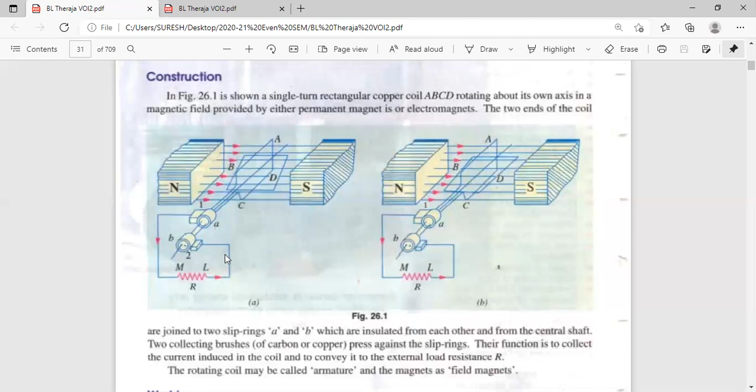So when EMF is developed, if you provide the closed path, then current will flow in this coil from negative to positive, like this. Again through C, D, A, B, again through brush 1, M, L, C, D, like this. This is your current direction.

Then why are they using the slip rings? See here, we have 2 slip rings I have shown, A and B, in the previous diagram. Actually, all these things are not necessary, but you should know if you want to study about DC motor. They are dividing this slip ring into 2 equal parts as a split ring, as segments A and B. Segment A and segment B.

Segment A is connected to brush number 1. Segment B is connected to brush number 2. The purpose of brushes is to collect the current from these segments. This A and B are called commutator segments.

You can also take 2 pole machine. If you take 2 poles, only north pole, south pole is there. If you take 4 poles, 2 north poles, 2 south poles will be there. See here, this is 1, 2, 3, 4. We can take 6 poles also. The second part is iron piece, that is magnets. See, the second part I will tell. First part is yoke. Second part is, see this one.

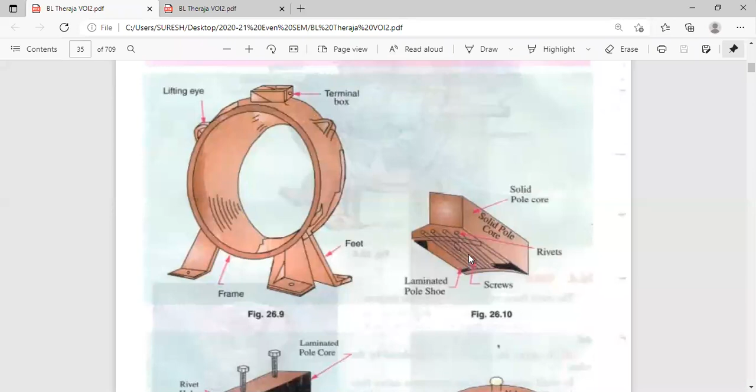This is the stator core cover, outer cover. Inside this outer cover, they will fix the poles. See, this is the iron piece, one iron piece. This is in the form of shoe shape. That's why it is called pole shoe also. See, this is the pole shoe. This will behave as magnet if you magnetize this.

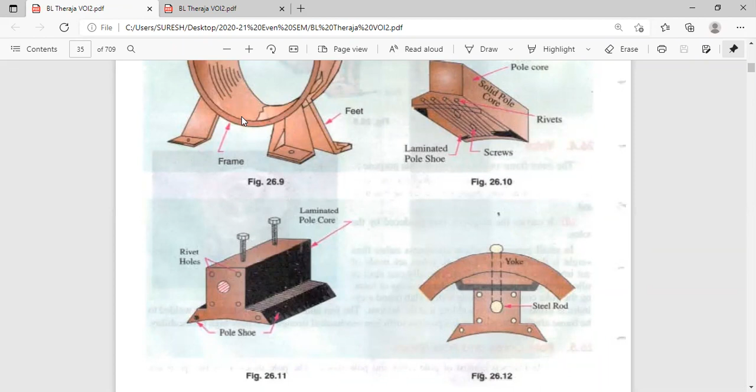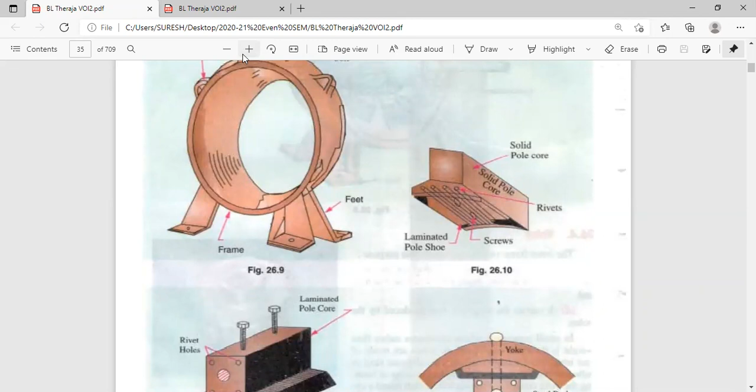So how are they fitting it to the core? With the help of bolts. See, 2 bolts are there in this. With the help of bolts, they will fix it in the stator frame. Suppose if you are having 4 poles, here 1, 2, here also 1, 2, 4 poles. If you are having only 2 poles, fix only 2 poles.

This is 1 pole. Suppose this is the magnet, how will we magnetize this iron piece as magnet? Which coil will we place? Flux coil or field coil or stator coil or pole coil. Coil means copper wire, core means iron piece. On this iron piece, pole core, they will wind one coil and connect it to the battery. When you give the battery, current will flow through that coil.

Around the current carrying conductor, flux will be developed, and this flux will magnetize this iron piece as magnet. In this way, it will behave as magnet. On the pole, we are having one coil that is called field coil. The third part is, see the third part.

Second part is iron piece, pole core, pole iron piece. Third part is pole coil or field coil. We will place one coil on the iron piece to make it as magnet. The purpose of field coil is only to make the iron piece as magnet. Now completed. This is the stator part: cover, iron pole core, magnets. On the pole core, we are placing one coil that is called pole coil.

Now come to the rotating part. Now we have completed the stator part. Now come to the armature core. Armature means the rotating part. This is the circular part. This is the armature, which rotates inside the motor or generator. This is the rotating part. This rotating part is having shaft. This is the shaft connected to this rotating part.

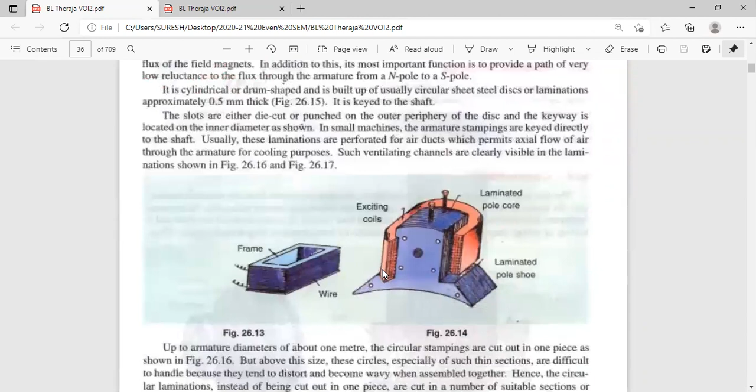See here, take one rectangular lamination sheet and cut it in the circular shape. See, they are taking one rectangular lamination sheet, they are cutting in the circular shape. After cutting this in circular shape, with the help of punching machine, they are punching the slots on the circular piece.

See how many slots are there? 1, 2, 3, 4. Let us take some 20 slots. I don't want to count. This is one slot. This is the second slot. This is the third slot. So one punching machine is there. Manually you can't do this. With the help of some automatic machine, we'll punch the slots.

This is one sheet. Like this, how many sheets are they taking here? See, they are fixing 2000 sheets. Is it visible? Let us assume this is 2000 sheets. They are placing all these sheets, and they are crushing with the help of weight. 100 tons weight they are taking. With the help of crane, they are lifting 100 tons weight and putting that weight on these 2000 sheets.

Then all these 2000 sheets are crushed to a very small size piece, which is called soft iron piece, which is in circular shape. Now see here, this is one slot. This is second slot. This is the third slot. This is fourth slot. Let us assume 20 slots are here.

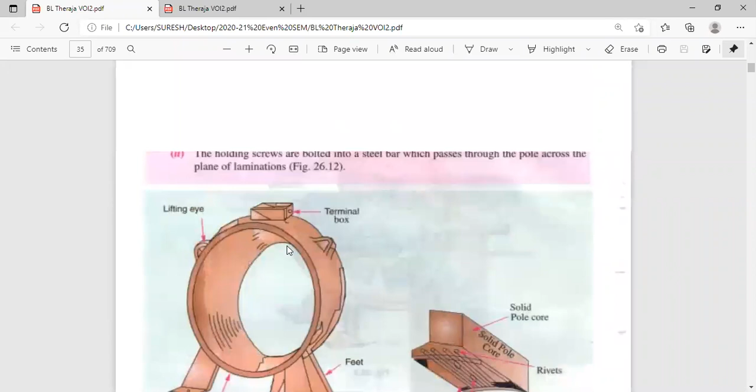Now, when this armature rotates in the flux, how many coils will rotate? 40 coils. See here, this is the armature. These are the slots 1, 2, 3, 4. Let 20 slots be there. 20 into 2, 40 coils will be there. When this is rotating, the magnetic flux is there in between North Pole to South Pole.

When this armature is rotating, the coils inside the armature are cutting this flux. The coil is nothing but rotating part. When the iron piece is rotating, automatically the coils inside the slots are also rotating. This coil is cutting the flux and EMF is induced in the armature coil, not in the field coil.

Remember this. There are only two coils. One is field coil for making the iron piece as magnets. Second coil is armature coil. This armature coil will rotate. When this armature rotates, automatically coils also rotate. When coils are rotating, the coil is cutting the flux and EMF is induced in the coil, not in the iron piece.

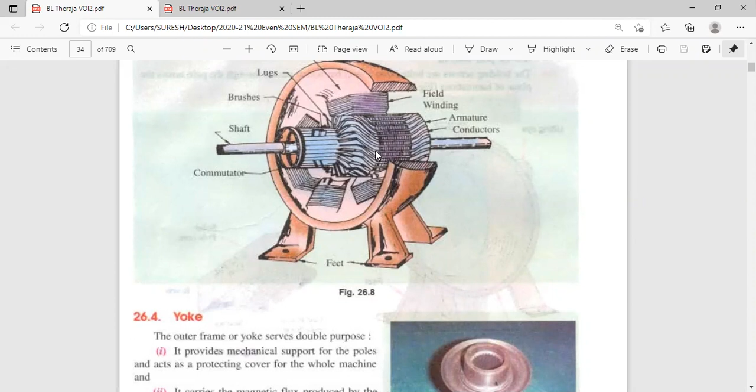See the parts. First one is yoke. This is the stator cover. This is the cover; it is made up of iron. Second one is pole core, pole core or pole shoe. Then pole coil. Why pole coil is used? Why pole coil is used? Anyone?

To make this iron piece as magnet. Okay. So this pole core is the iron piece. Pole coil is the coil, winding. Pole coil means winding, core means iron piece.

Next, fourth part is rotating part, armature. Armature is called rotating part. See here, this is the armature, rotating part. I have already told how to design this armature core. In the slots of the armature core, they will place the armature windings or copper winding. Armature winding is nothing but copper winding. These are the copper windings there.

Let us assume 20 slots are there and 40 coils. In each slot, 2 coils. Suppose in each slot, if you place 3 coils, how many coils will be there in the armature? Slots are 20. In each slot, 3 coils. How many coils will be there in the armature? 20 into 3. How many coils? 60 coils will be there in the armature.

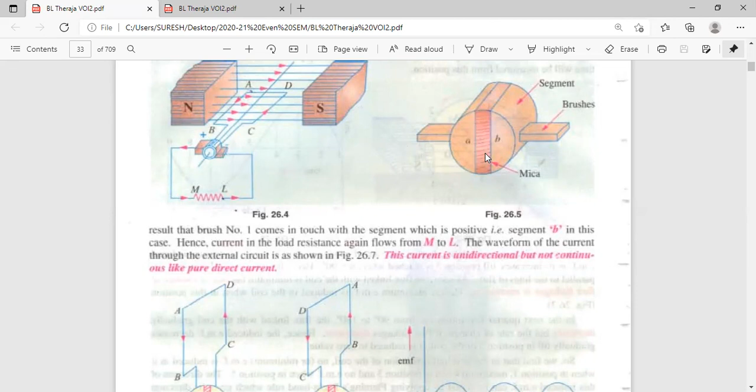So when the coil is rotating, see, ABCD is the coil. After 180 degrees, this CD will come this side, AB will come this side. See, interchange. In these two diagrams, observe. Total 360 degrees rotation will be there when armature is rotating. AB is this side initially. After 180 degrees, CD is coming this side. Again after 180 degrees, AB will come, 360 degrees. So when AB is connected to segment A, CD is connected to segment B. After 180 degrees, when AB is coming this side, segment A is also coming this side, rotating. Segments are interchanged, but brush positions are not interchanged.

Observe this diagram. A and B are the commutator segments. These two segments are interchanged after 180 degrees. This B is coming this side and A is coming this side. But brushes are not interchanged. Brushes are not connected to segments; they are in contact with A and B. Please remember, these brushes 1 and 2 are in contact with A and B. They are not connected to A and B. They are making the contacts. These brushes will collect the current from these contacts, A and B.

So since the brush position is not interchanged, your current direction will not change in the load. When AB is this side, current is flowing through ML. When CD is coming this side, still the current direction is not changed. That means these brushes are collecting the current from the commutator segments. Whatever the EMF developed in ABCD is AC EMF, but the current flowing in the load is DC current. Even though the voltage developed is AC, since the current direction is not changed in the load, your output current is DC. This is the DC generator principle.

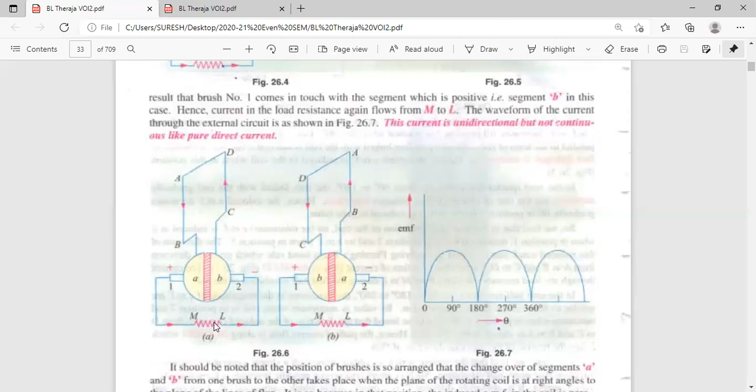Is it clear? All these parts, is it clear?

Yes, sir. Now see here, this DC generator is not in your syllabus. Nobody will ask about these parts or this diagram. But if I'm not explaining the DC generator, you can't understand induction motor - what is stator, what is rotor. All these things are not there in the induction motor, but I had to explain these things. That's why first, if you understand this concept, then I can easily explain the fourth unit.

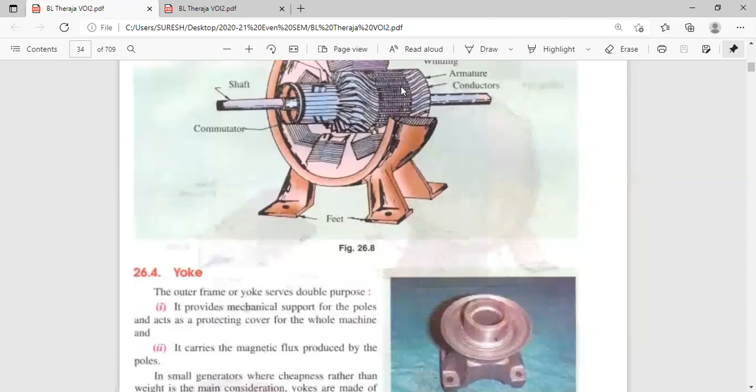Now see this, why they are taking iron piece? Directly they can place the coils. I have already told what is the property of iron piece - it is having low reluctance. Have I told or not? See here, the purpose of iron piece, I will tell you, write down in your notes. F is equal to phi into S. Otherwise, I will write it on the board for 1 minute.

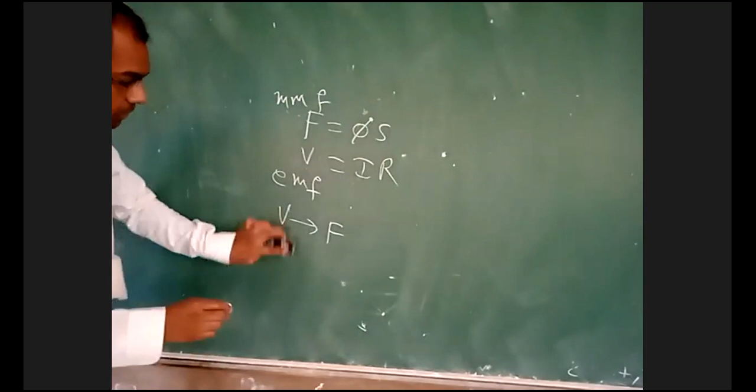See here. F is equal to phi into S. V is equal to I into R. F is the MMF - in magnetic field we call it MMF, here it is EMF. So analogous for V is force - magnetic force, electromotive force, magnetomotive force. Analogous for current is flux. In electric field we call it current, in magnetic field we call it flux. R is the resistance, S is called reluctance - R is called resistance in electric quantity, but in magnetic field we call it reluctance.

See here, current is inversely proportional to resistance. Similarly, flux is inversely proportional to reluctance. Next, in electric quantity, resistance will oppose the current. From this equation, if resistance is less, current will be more. If resistance is high, current will be less. That means in electric quantity, resistance is opposing the current.

In magnetic quantity, anyone? Magnetic quantity - reluctance will oppose the flux. Suppose if reluctance is less, flux will be more.

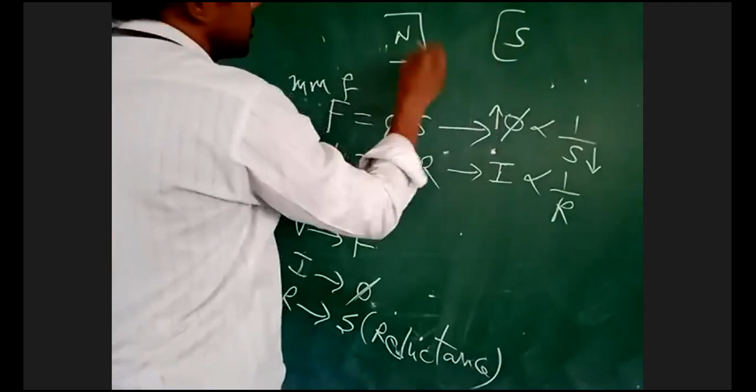We are having north pole and south pole. We are winding the field coil on the north pole and on the iron pieces. Suppose if current is passing through this coil, around the current carrying conductor, flux will be developed. Then they behave as magnets. Once they are behaving as magnets, phi is there in between north pole to south pole. Flux is there in between north pole to south pole.

Suppose if I am not writing down note - iron is having low reluctance. Write down note: iron piece is having the property of low reluctance. Now tell me, if reluctance is less, what happens to the flux? If iron piece is having low reluctance, what is the flux in the iron piece? It increases. So I want more flux in between north pole and south pole. That's why I'm using iron pieces.

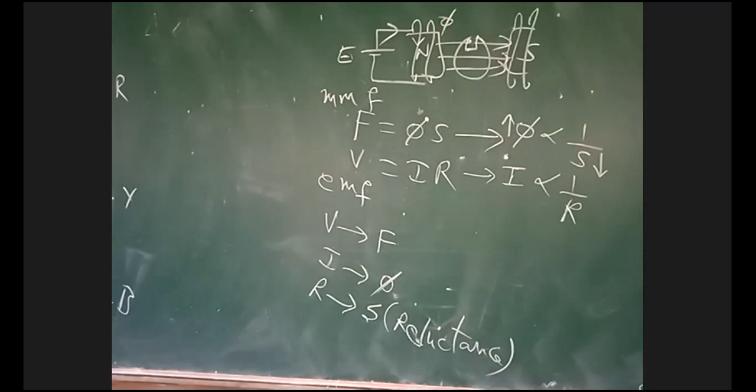I think it is clear about the iron piece, why you are using the iron piece. Yes sir, next we will go for the yoke.

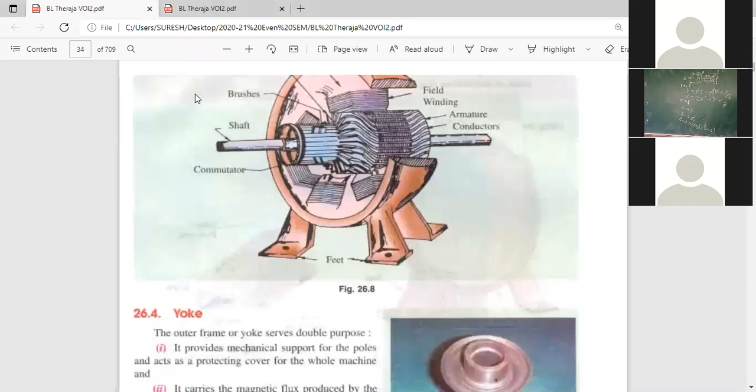Now we'll discuss the yoke. They have given two points about the yoke. What is yoke? It is the stator cover, the protecting cover, which I have already shown you. One circular part I have shown. See this circular part, this is the protecting cover. This is called the yoke, we will call it yoke.

The yoke is made of iron. Why this yoke? What is the advantage of the iron piece? I have already told you. What is the first advantage? To increase the flux.

See on the screen, they have given two points in red color for the yoke. First point: it provides mechanical support to the poles. Mechanical support means because to this stator cover you are fixing the magnetic poles, the pole shoes. It will give mechanical support without any vibrations in the house, and we are fixing it to the ground.

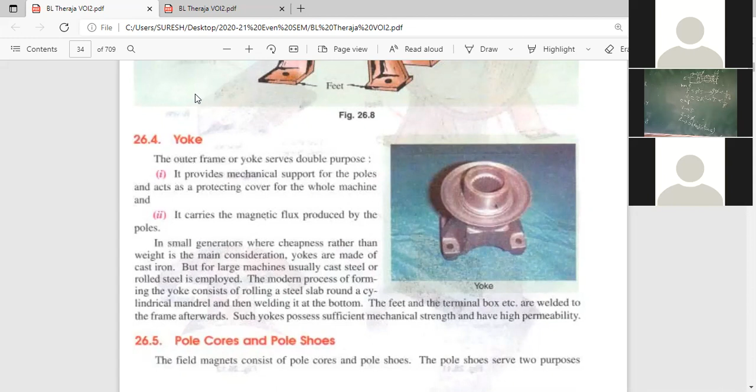What is the second point? It carries magnetic flux, more flux produced by the poles. If you use the iron piece, it will allow more flux to pass through it. These are the two advantages of the iron piece. That is about the first part. So these are some of the parts in the DC generator.

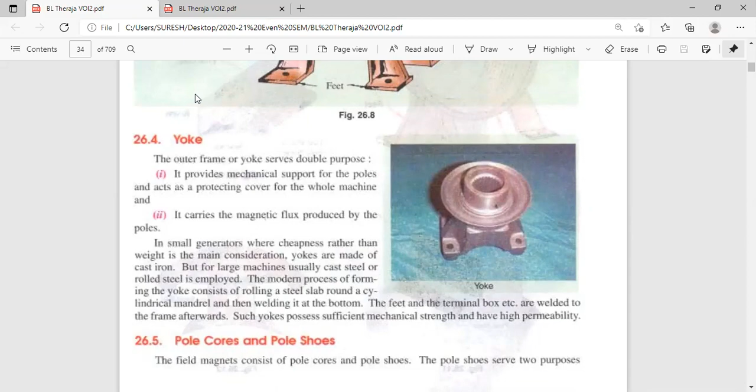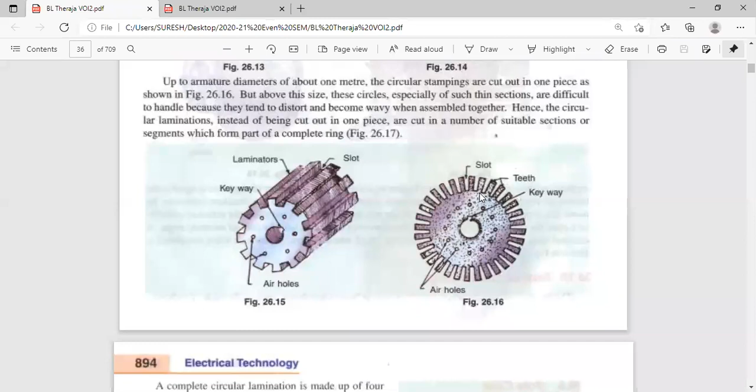See, this is about the armature core. In the slots, we are placing the coils. Coils means copper wire. Armature windings are nothing but armature copper coil.

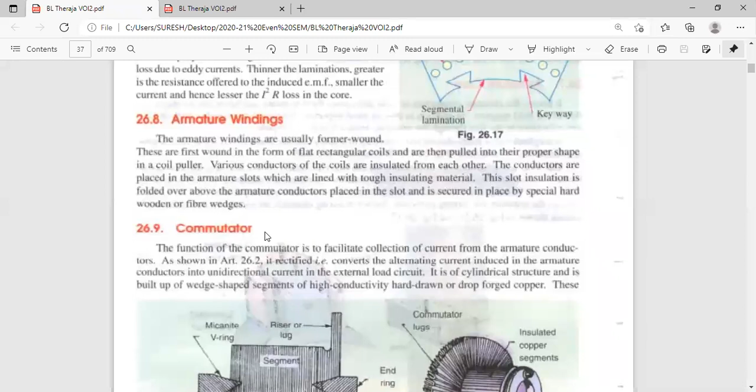Next is the commutator. The commutator, as already told, converts AC to DC. Next one is brushes. The brush's function is to collect the current from the commutator. These brushes are made up of carbon or graphite.

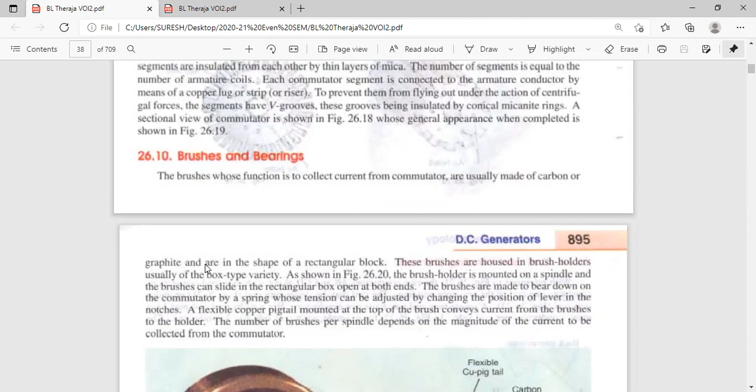Bearings are used to reduce the friction. Ball bearings are used to reduce the friction.

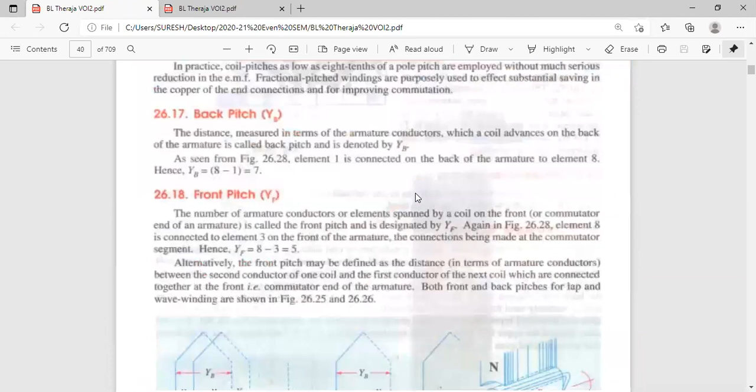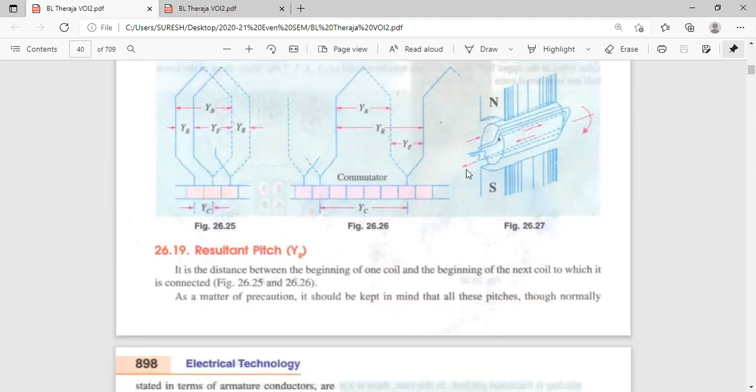Suppose if you are having, see how many coils? 1, 2, 3. This is the starting end of the coil, this is the finishing end. Like this, this is also having a starting and finishing end. Number of coils you can take, these connections are not in your syllabus. How to connect? This is the starting, this is the finishing end of the coil. Again, for the second coil, this is the starting, and somewhere there will be the finishing end, like this. Number of coils you can connect in the armature.

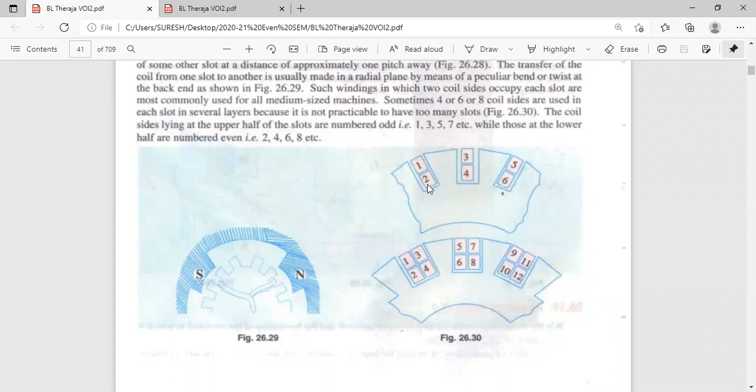See, in one slot we can place 2 coils. In one slot we can place 4 coils also. Otherwise we can place only 2 coils. We can place 8 coils also, or 10 coils also in one slot. In each slot of the armature, we can place any n number of coils. That depends upon the winding. If you want a big size generator, we will place more coils. If you want only a small generator for our house, we will go for fewer coils.

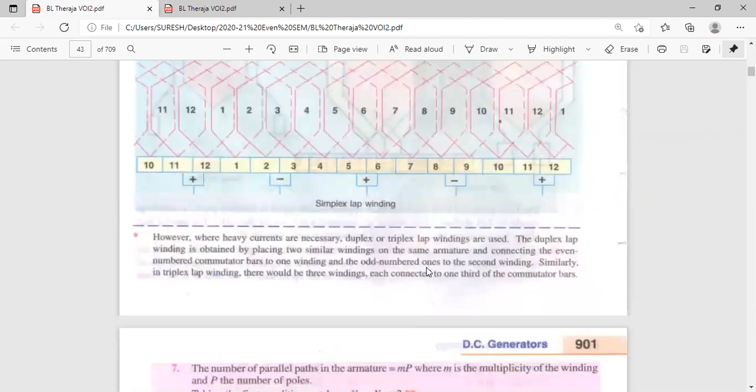For industries, we need big generators. There are 2 types of connections not in our syllabus. Now we'll see the equivalent circuit of the DC generator. All these are not in our syllabus.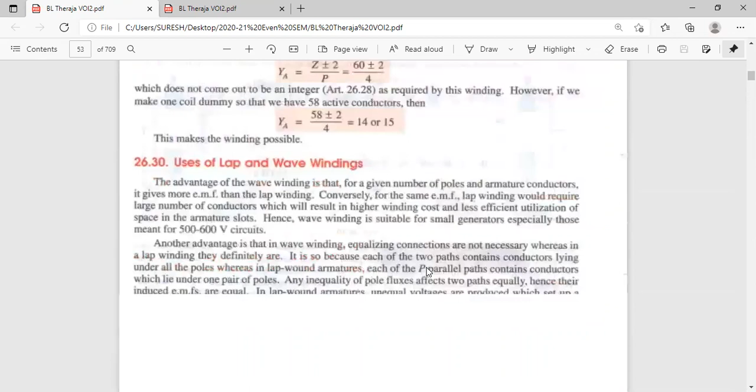Okay see here, we are having 2 coils as I have told. One is the field coil, another one is the armature coil. This is the circular part, I will write it on the board so you can understand.

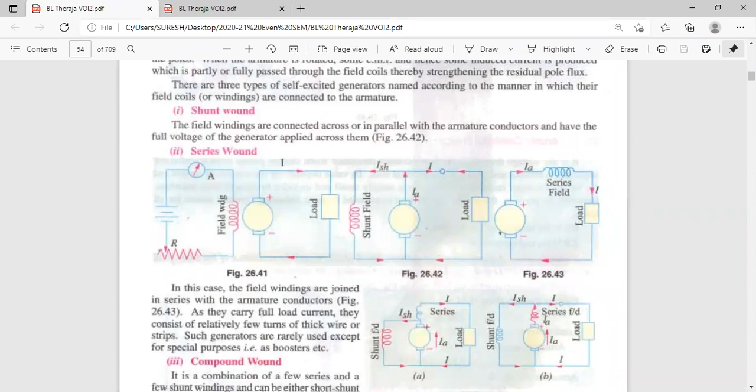See here. This is the armature, this is the symbol for the armature. In the armature we are having one coil, called the armature coil. This is the circuit symbol for the armature. Inside the armature, in the slots, we are placing one coil. This is called the armature coil.

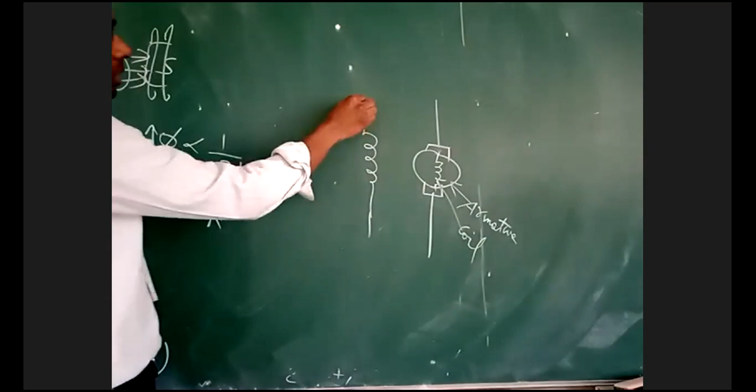This is the field coil. On North Pole and South Pole, we are having one coil. This is called the field coil.

In the armature, whatever coil is there, this is called the armature coil. Totally you are having 2 coils. One is called the armature coil, another one is the field coil. This armature is connected to the load, or external resistance R.

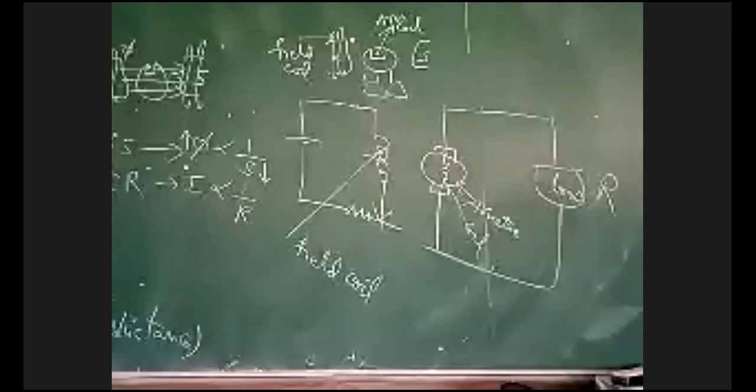So in the equivalent circuit, totally how many coils are there? 2 coils. One is the field coil, which is there in the magnets. The purpose of the field coil is, suppose if you apply the battery voltage, current will flow through this coil, and around the current carrying conductor flux is developed. The purpose of the field coil is only to generate the flux. Then where are the North Pole and South Pole? Here North Pole is there, South Pole is there, on the iron piece. Here I am not showing the iron pieces. In the equivalent circuit we won't show the iron pieces, only we'll show the coils. So one is to generate only flux, the field coil.

That's all. Now this armature will rotate and it will cut the flux. That circular part is the armature symbol. That armature will rotate and cut the flux phi, and EMF is developed. Where is EMF developed? Can anyone tell? In the armature coil, EMF is developed. Please remember, in the field coil EMF will never develop, only in the armature coil EMF is developed. If you remember this, nothing else is there in these machines, then you can understand everything. Only two coils. The purpose of the field coil is to generate the flux. Once flux is generated, then the armature rotates in the flux and dynamically induced EMF is developed in the armature coil.